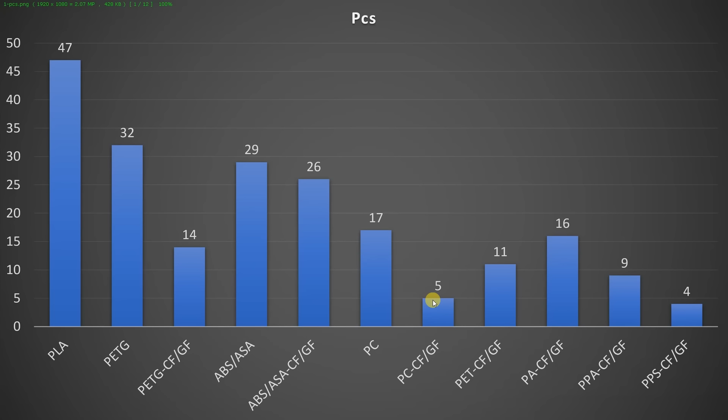Here you can see the grouping and how many items are in that group. Sometimes the first half I will call basic materials, and the second half I will call engineering filaments, even if ABS and ASA could belong to both. Glass or carbon fiber filaments are in a separate group, so at the end we can learn about the effect of fiber reinforcement too.

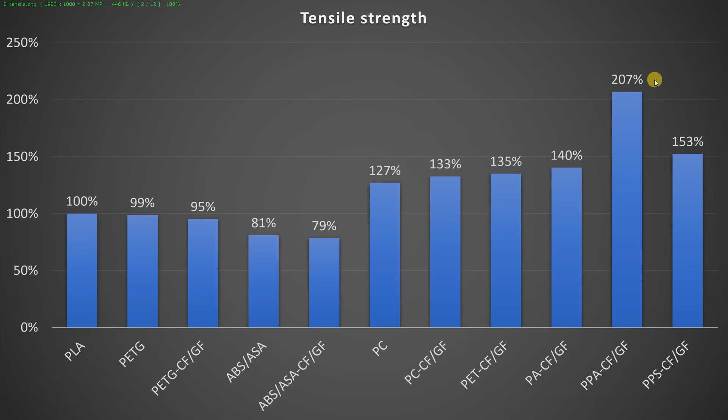Tensile strength. The object is printed in horizontal position with the smallest cross-section area of 4x4 mm, and I'm pulling it until the break. For basic materials, we can see that PLA is the strongest and ABS/ASA is the weakest, even if reinforced with carbon or glass fibers. From engineering materials, more or less they are very similar, but a big jump we can see with PPA-CF, which is almost too strong for my basic crane scale.

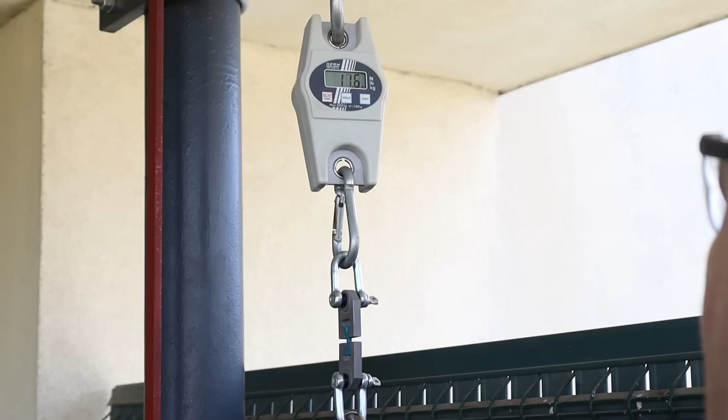Layer adhesion. The object is printed in vertical position and also the smallest cross-section area is 4x4 mm, and I'm measuring the break load. From basic materials, PLA is the strongest and by far the weakest is ABS/ASA. Usually fiber reinforcement makes this layer adhesion weaker in most cases, except with PETG. Looks like the company somehow solved that carbon or glass fiber reinforcement sticks well to the basic materials, and I could measure some really good layer adhesion here.

One more thing to mention: PPA-CF is incredibly strong, but compared to the horizontal tensile strength, which I usually compare in the videos, this looks weak. But if we compare this to the other materials, this is very good layer adhesion.

Two-sided shear test. The object is printed in horizontal position, diameter is 5 mm, and I'm pulling until the break. From basic materials, PLA is the strongest, but there is no big difference between them. Engineering filaments are stronger, but by far the strongest is PPA-CF. We can see that in every case, fiber reinforcement helps with horizontally printed objects.

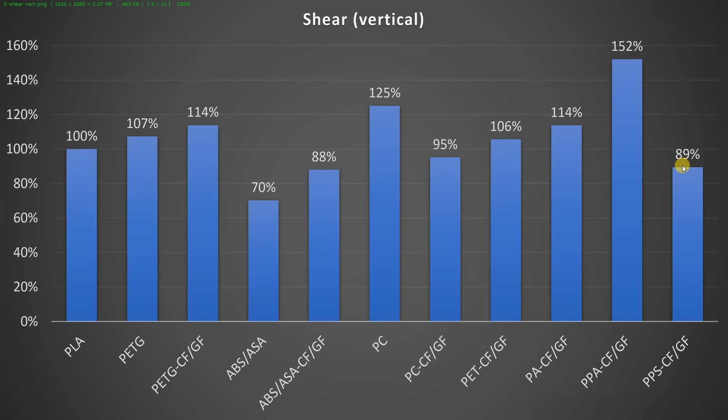Same two-sided shear test, but objects are printed in vertical position. I started this testing much later, but I have at least 50% of the measured data, so I believe that's enough for some relevant analysis. From the basic filaments, we can see that again ABS/ASA is significantly weaker, mostly because of that weaker layer adhesion. From other technical filaments we can see big differences and deviation, but still by far the strongest is PPA-CF.

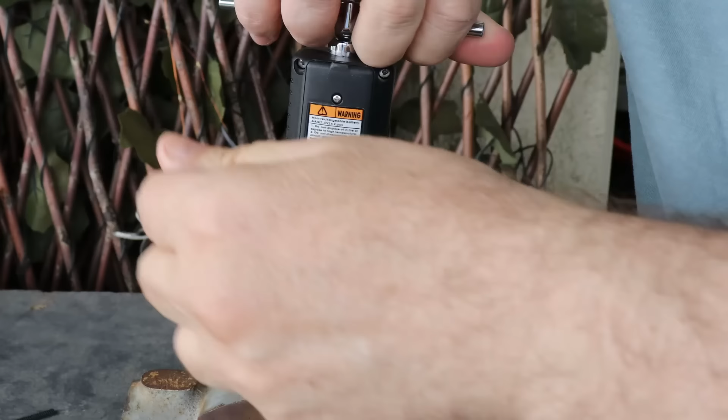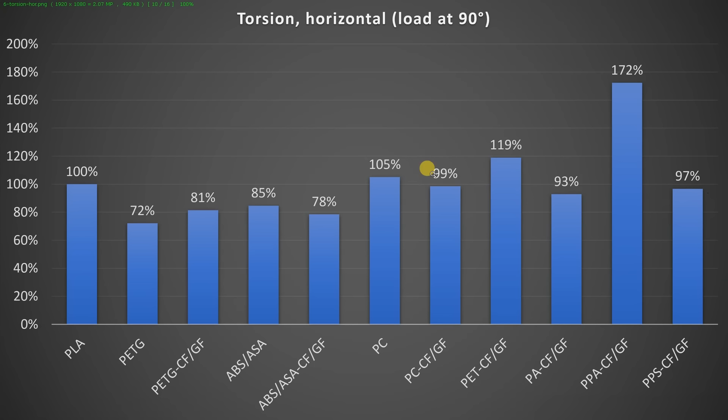Torsion test. Objects printed in horizontal position, diameter is 6 mm, and I'm measuring the load at 90-degree rotation and also the maximum load, but on the graph I present only the load at 90-degree rotation. We can see that from basic materials, again PLA is the strongest. Other technical filaments are more or less very similar, except PPA-CF, which is again very strong in this test.

Same torsion test, but objects are printed in vertical position. Here it usually breaks suddenly, so I can measure only the max load. We can see from basic materials that yes, PLA is the strongest, but the difference is not big. Again with technical filaments, we can see some small jumps, but they are very similar to each other, except again PPA-CF, extremely strong in this test.

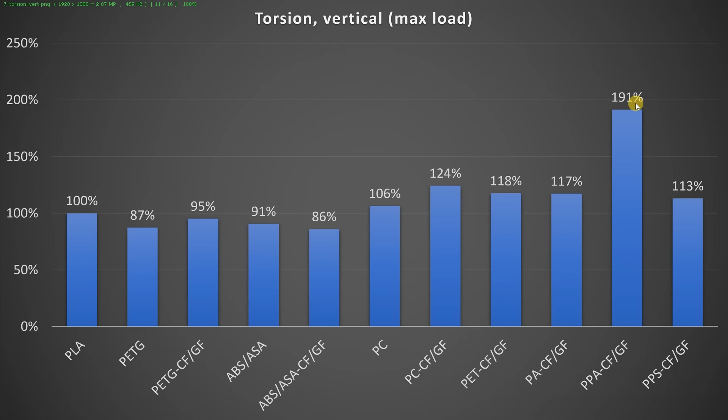IZOD impact test, object is printed in vertical position. Now I'm measuring the Charpy test too. I'm just presenting it here, but I don't have enough data since I started with this test much later.

We can see the most important property of the ABS-ASA material: it is the toughest between all filament types. Another myth is busted here. Pay attention to these numbers, this means the PETG is more brittle compared to the PLA.

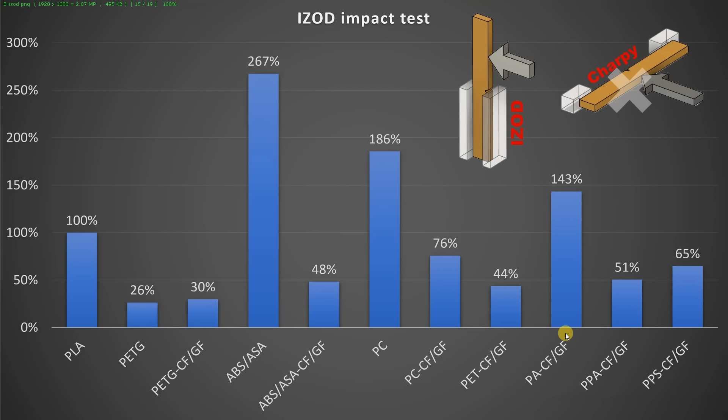Polycarbonate without fibers is the second toughest filament type, and this is maybe the only weak point of the PPA-CF. And the strongest fiber-reinforced filament in this test is the PA, polyamide, usually PA6 or PA12.

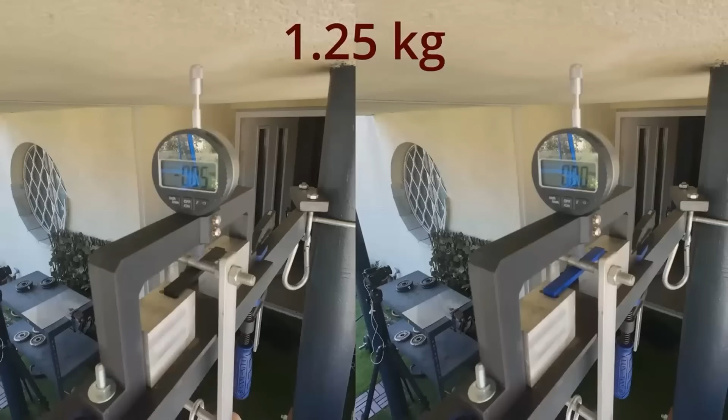3-point bending test. Distance between supports is 50mm, and I'm placing these loads one by one every 1 minute, measuring the deformation after 1, 30 and 60 seconds. On this graph you can see the deformation under 5kg after 30 seconds, and of course this is the deformation, so smaller is better.

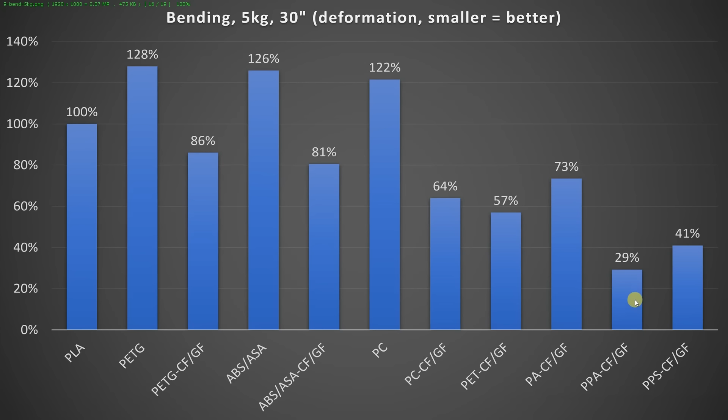There are several conclusions. First, from all non-fiber-reinforced filaments, the PLA is the strongest. Another conclusion is that fibers help in every case, no exceptions. And from all filaments, the two strongest are the PPS-CF and of course PPA-CF, with very minimal deformation during this test, even under 10kg. Another bending test on my universal testing machine, which follows better the ISO 178 standard.

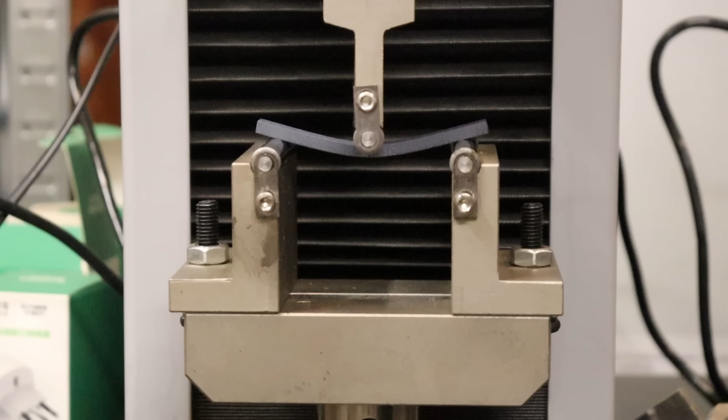Distance between supports is 64mm and the supports are rounded, diameter 10mm. I started this test recently and have only a few measurings here, but even from that we can see that the fibers help with the stiffness. Bending strength depends on the maximal load, and the elastic modulus depends on the deformation too, but every time the fibers, with the ASA, ABS or with the polycarbonate, help. I believe the differences should be very similar to this one, but I have only a few measurings so far.

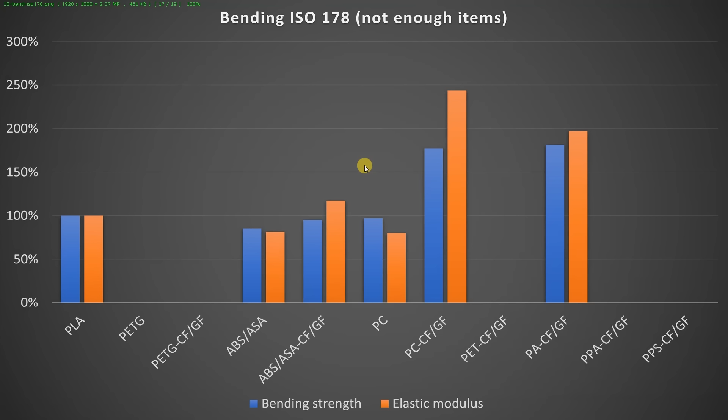Creeping, the deformation under constant load of 1.25kg in this case. I'm locking the position and measuring the distance between two reference surfaces daily for the next 5 days. Here we can see the deformation after 1 day.

Another conclusion is that the fibers always help here a lot, here we can see 3 examples. Another conclusion: PA or nylon, this is PA6 and PA12, don't like constant load. It is good in other things, but it will deform under constant load.

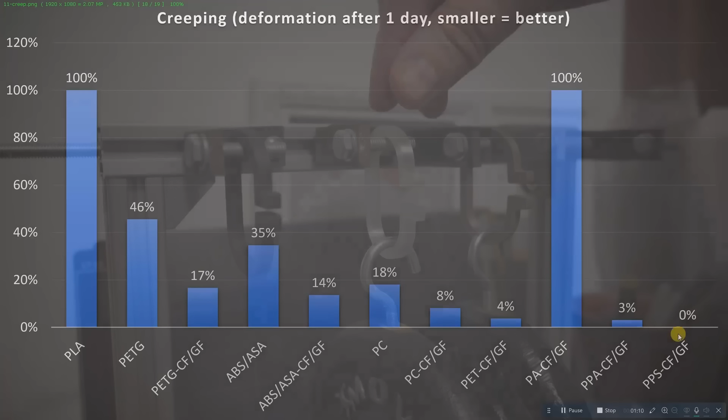Now, PPA-CF and PPS-CF. If I place the load, the deformation with the PPA-CF is smaller. This means smaller stress, but even with that bigger stress of the PPS-CF, it will not have any additional deformation. So in this test, clearly the winner is PPS-CF.

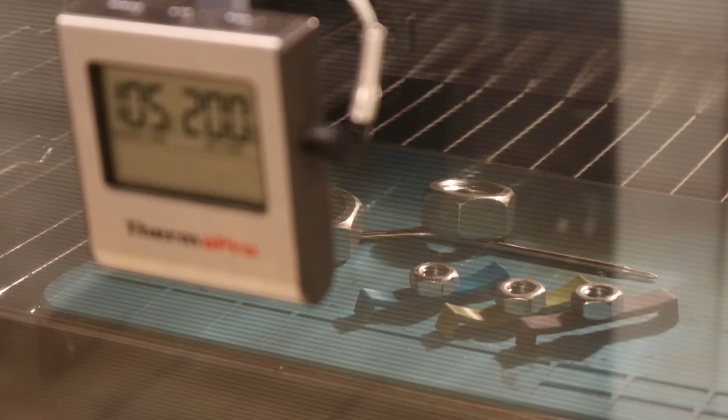Temperature test in the oven. M10 nut as a small load, and I'm recording the temperature of the first noticeable deformation. We can see another weak point of the PLA: it will start to deform at 50-55 degrees Celsius.

PETG at 65-70, ABS-ASA around 90. Now in percentage, these numbers are quite close to each other, and the reason for this is that a few companies solved that - I think it's crystallization during the printing - and instead of 50-55 degrees Celsius, it will start to deform far above 100 degrees Celsius. This completely deformed my statistics in percentage.

Another conclusion is that the fibers always help, here we can see 3 examples. In some cases, annealing can help, for example with the PET-CF and PA-CF; in this case we can increase this temperature resistance. This data is all without annealing.

Theoretically, we can anneal PLA too, but it will deform, shrink, and warp during this process, and if we need dimensionally accurate objects, it will be completely useless. I have several videos about this. The fibers will reduce this shrinking and deforming. Between PPA and PPS-CF, the PPS is better, but in both cases these temperatures are above the possibilities of my equipment, so this data is from the TDS.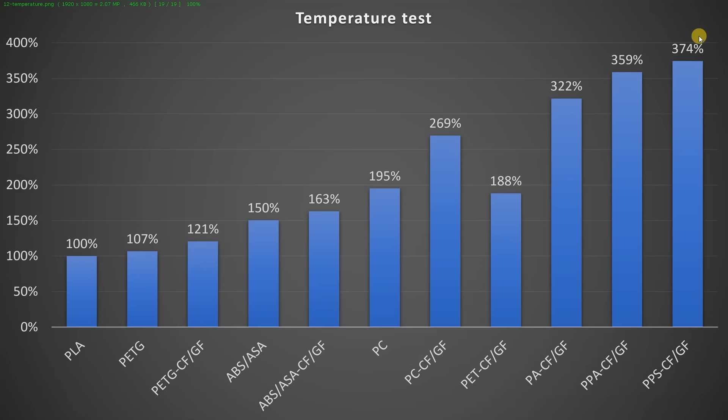About these materials, well, don't forget that here I covered mostly mechanical properties, but there is so much more. For example, PLA is still easiest for printing. PETG is a technical filament which is also printable on an open printer. ASA is a UV resistant material. PPS is one of the most chemical resistant filaments.

There are some filament types which are not covered in this video, like polypropylene. I tested only 2 types so far, and I have 4 more. Looks like it is a very fatigue resistant material, resistant to repeated stress.